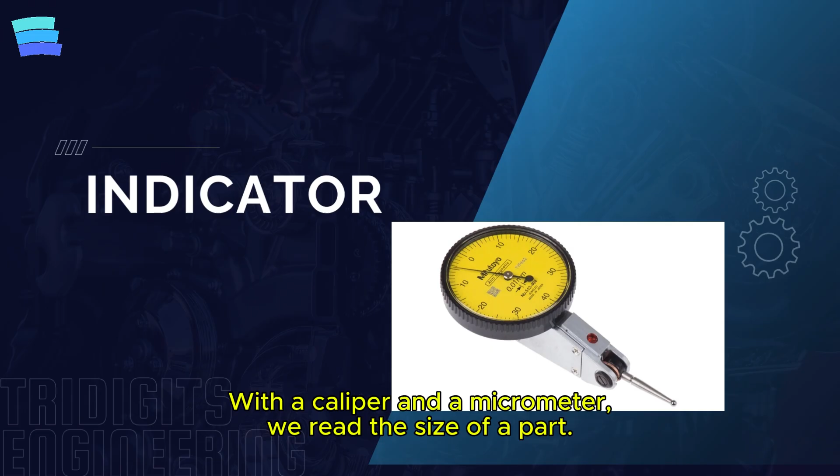With a caliper and a micrometer, we read the size of a part. With an indicator, most of the time we do not read size, but deviation. In other words, we quickly see how much the part shifts from a reference value. That is why it is one of the most practical tools in the shop for runout checks, alignment, level differences, and parallelism.

In manufacturing, the need was simple: make very small movements large enough that everyone could read them the same way. This idea matured with amplification mechanisms similar to clockwork. Over time, two main families appeared: the type with a tip that moves in and out in a straight line, and the lever type. Where higher sensitivity was required, the same approach continued with electrical measuring probes.

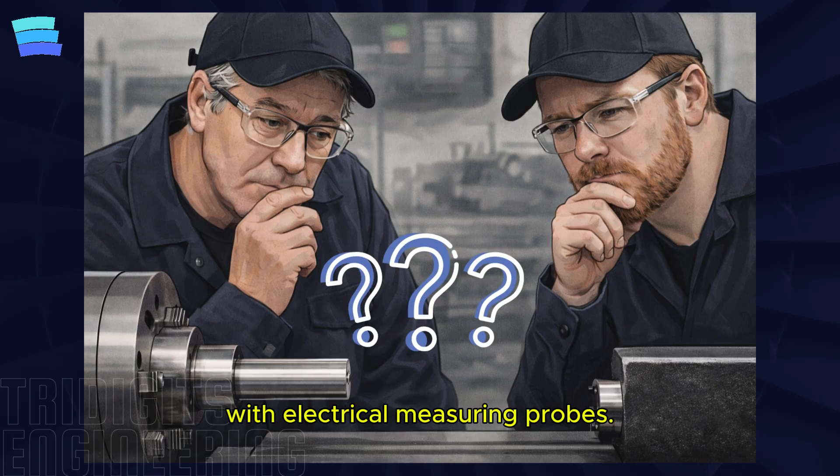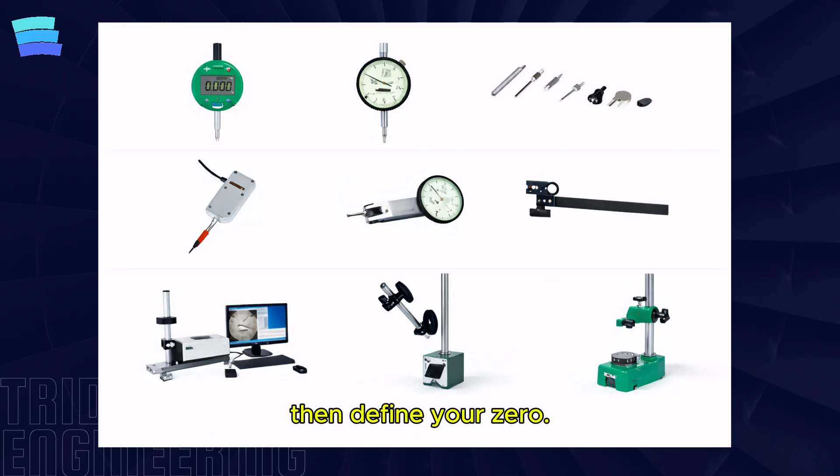Now to the core question: what is an indicator? An indicator performs comparative measurement. Rather than giving an absolute number, it shows the difference relative to a reference value. That is why the first step is always the same: choose your reference, then define your zero. Zero does not have to be the true size of the part. It can simply be your starting point.

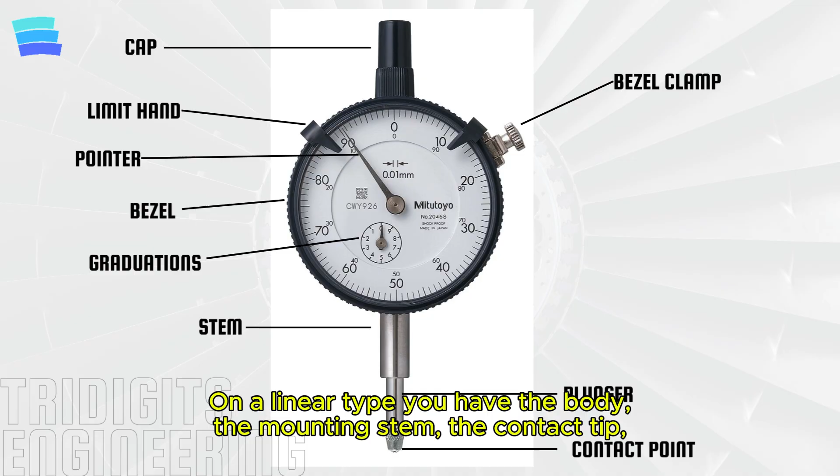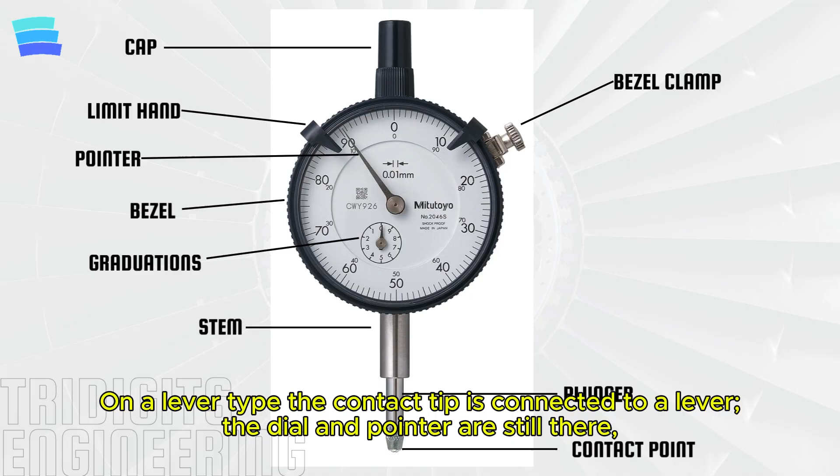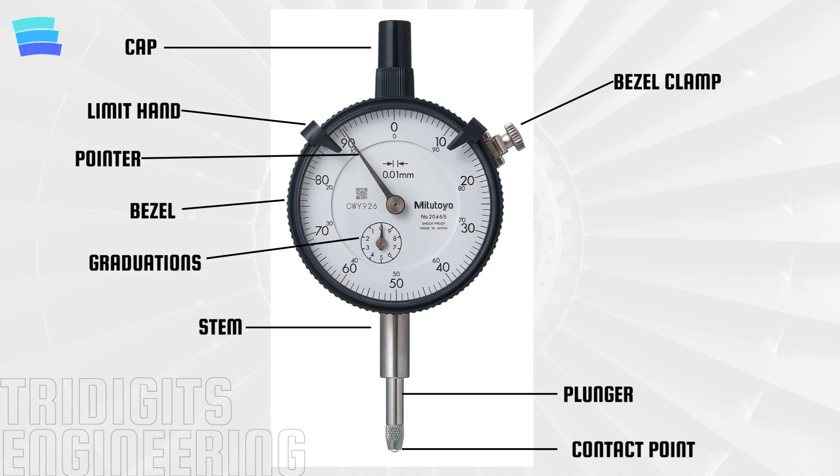With that clear, let's quickly identify the main parts of an indicator. On a linear type you have the body, the mounting stem, the contact tip, the dial, the pointer, and the zero setting bezel. On a lever type the contact tip is connected to a lever. The dial and pointer are still there, but the contact angle becomes more critical. On digital types you see the value on a display, and you can set the starting point quickly with the zero button. So how does an indicator work?

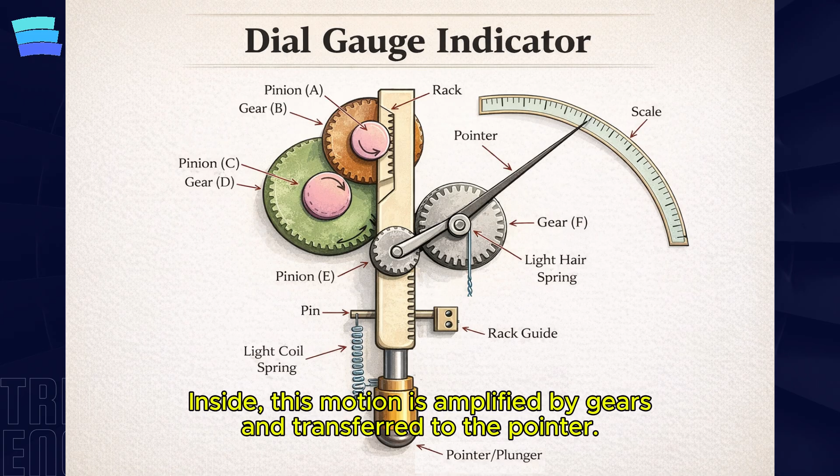On a linear type, the contact tip moves in and out. Inside, this motion is amplified by gears and transferred to the pointer. Two things matter here: the resolution and the measuring range. The logic is the same on digital types as well. You see the deviation as a number on the screen.

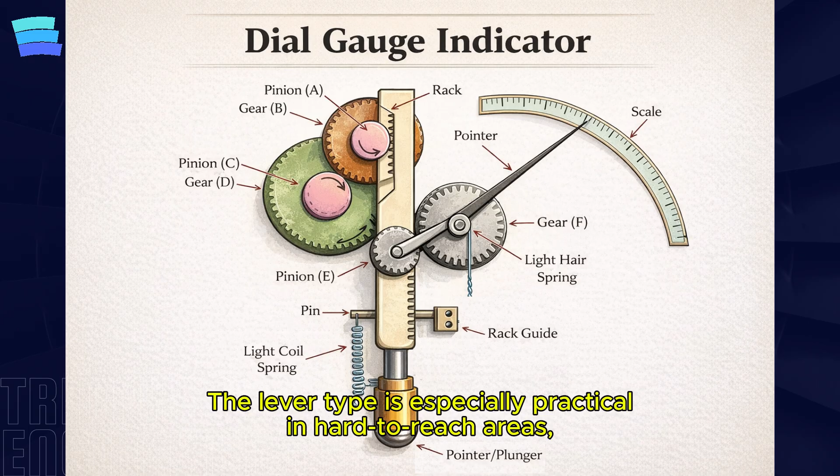The lever type is especially practical in hard-to-reach areas, when scanning a surface, and during alignment. The key rule to remember is this: the more the contact direction differs from the direction you want to measure, the smaller the value you read. So keep the tip working as close as possible to the direction you actually want to measure. Also, if the contact point is not positioned correctly, the body can rub instead of the tip, and that will distort the reading.

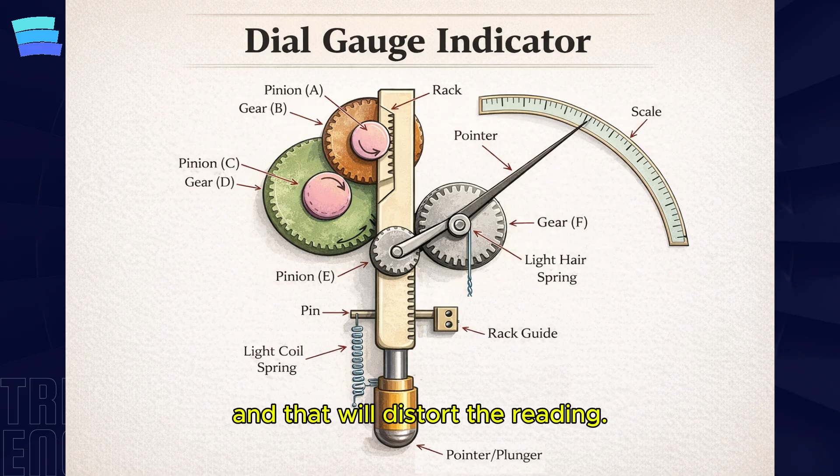Up to this point we covered what the tool does and how it behaves. Now let's address the same part, same tool, different result issue. An indicator is not a complete measuring system by itself. The stand, the mounting elements, and the contact setup are part of the result. If the stand is loose, joints are moving, or the magnetic base is not seated properly, you are not reading the part, you are reading the stand's deflection.

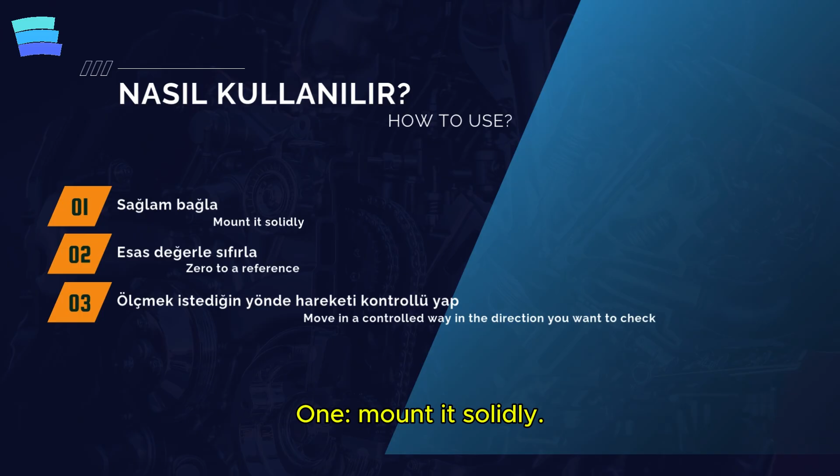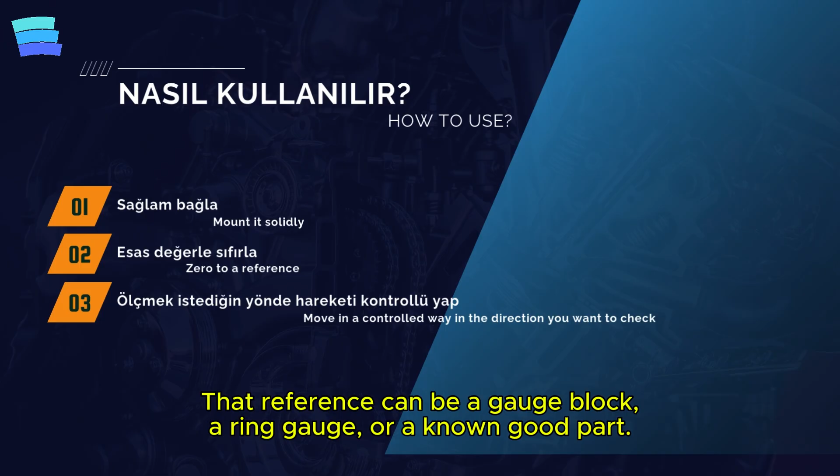That is why it helps to think of the use in 3 steps. 1. Mount it solidly. Seat the base on a clean surface, tighten the joints, and apply light pressure at the tip. 2. Zero to a reference. That reference can be a gauge block, a ring gauge, or a known good part. 3. Move in a controlled way in the direction you want to check, and observe the maximum and minimum values.

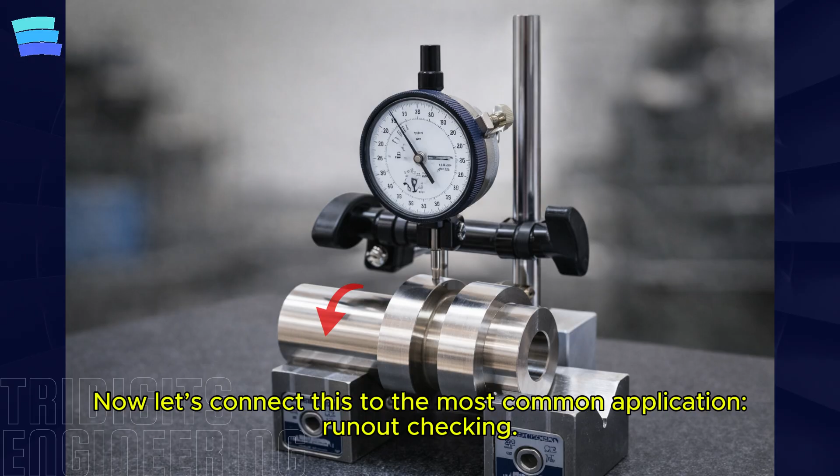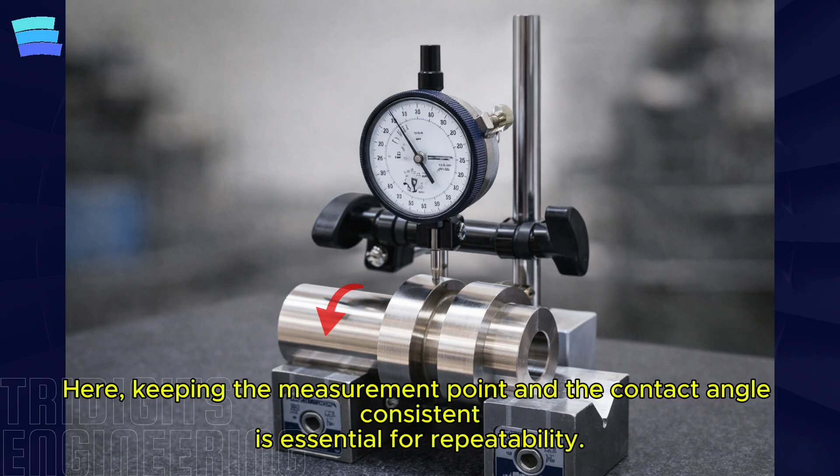Now let's connect this to the most common application: runout checking. While rotating the part, the difference between the highest and the lowest reading gives the runout magnitude. Here, keeping the measurement point and the contact angle consistent is essential for repeatability. If the measurement point shifts, the reading shifts as well.

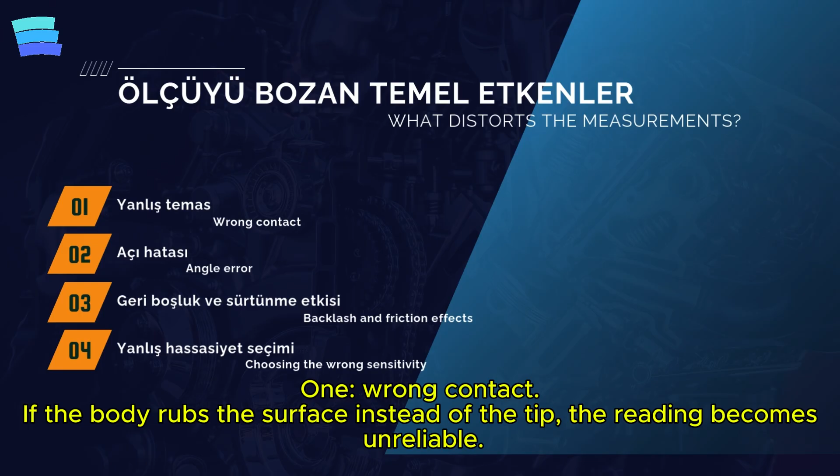Now let's summarize the main errors that distort the result. 1. Wrong contact. If the body rubs the surface instead of the tip, the reading becomes unreliable. 2. Angle error. As the contact direction moves away from the measurement direction, you will make the deviation look smaller than it really is. 3. Backlash and friction effects. If your approach direction changes, the reading can change too, so measuring by approaching as consistently as possible is a good habit.

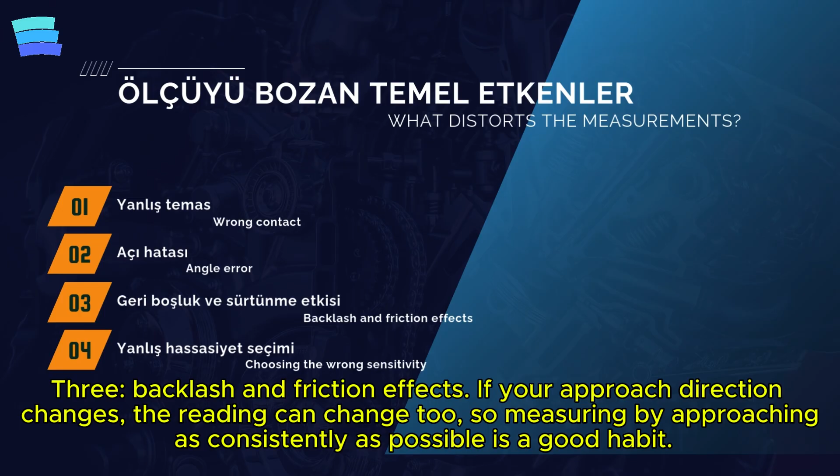4. Choosing the wrong sensitivity. If the acceptance band is tight, a coarse resolution is not enough. If you go too sensitive, you can unnecessarily complicate the setup and increase the effect of vibration and pointer fluctuation.

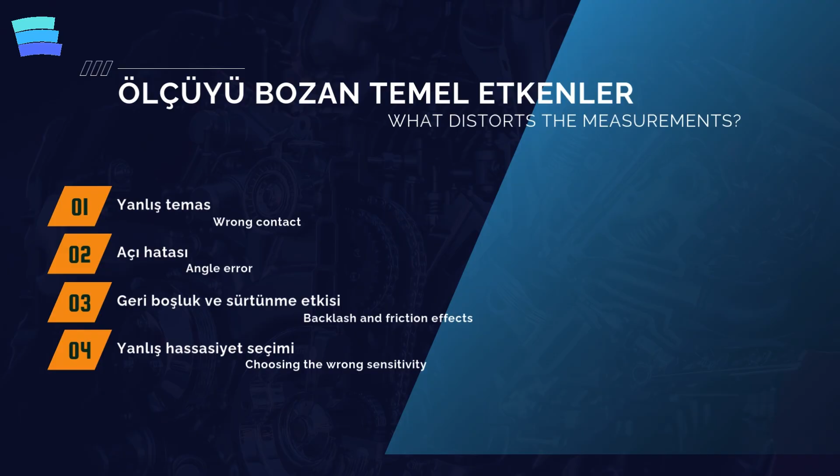In practice, there is also a useful way to read with an acceptance band. Bring the part to 0, then mark the upper and lower limits in your mind on the dial. As long as the pointer stays within that band, the part is acceptable. If it goes outside, there is a problem. This makes it easier to see the change without getting stuck on a single number.

A small habit before measuring makes a big difference. Quickly wipe the contact tip and the measured surface. Avoid holding the part for a long time and warming it up, and do not press harder than necessary during measurement. These small details can strongly affect the outcome when working with tight limits.

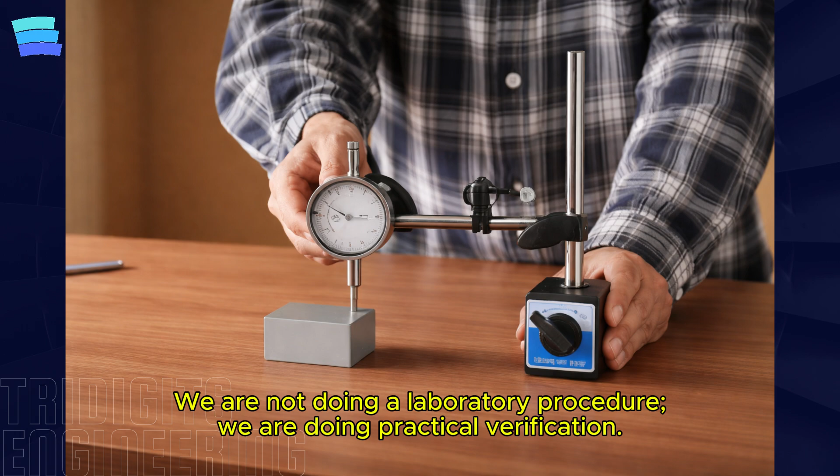So how do we quickly check? Is the tool correct? In everyday work, we are not doing a laboratory procedure. We are doing practical verification. On a suitable stand, check 2 or 3 points across the range using a few different gauge blocks.

Approach the same value from the same direction every time. If the reading changes each time you return to the same block, this is very often setup related: mounting, angle, dirt, or contact. If the setup is solid and it is still inconsistent, friction or backlash inside the indicator is also a possibility.

In summary, an indicator is for reading deviation. For reliable results, focus on 3 things: a solid setup, the correct contact direction, and a consistent approach direction. If these are right, both dial and digital types can do the job.